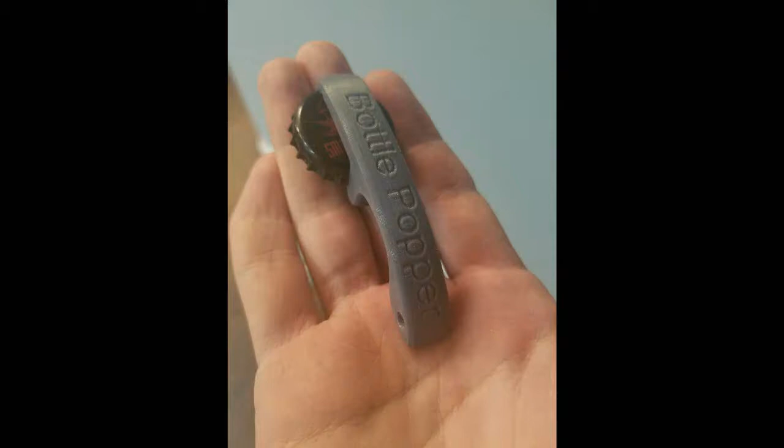Today I'm going to show you how to make a bottle opener. It's a deceptively challenging design, at least the way I did it. I know it looks simple, but there's a few things that at least tripped me up, so maybe you're smarter than me, maybe not. I guess you'll have to watch to find out.

So let's get started. As with any design, we're going to start with a little sketch here. Alright, and we've got some dimensions there. And then, of course, when you start the sketch in Fusion 360, the first thing you want to do is add some parameters as well. You can pause and save those if you need.

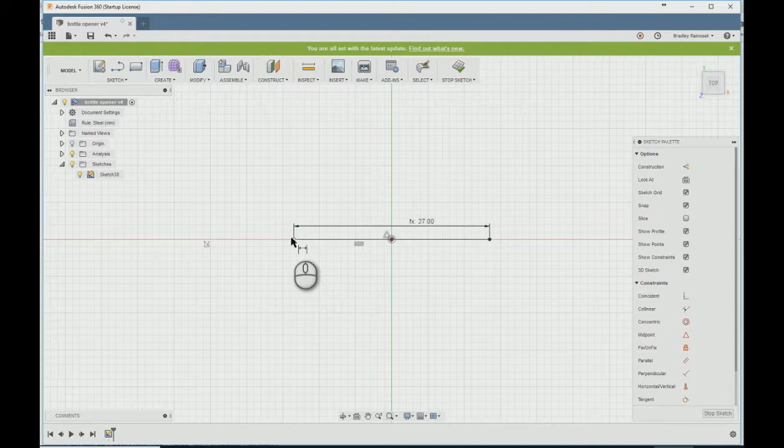Alright, we'll start our first sketch. And then just rough drawing, get everything lined up after you get the basic shape. We're going to do all of these constrained lines first, and then you want to go on to your splines and things that are going to be variable throughout the design.

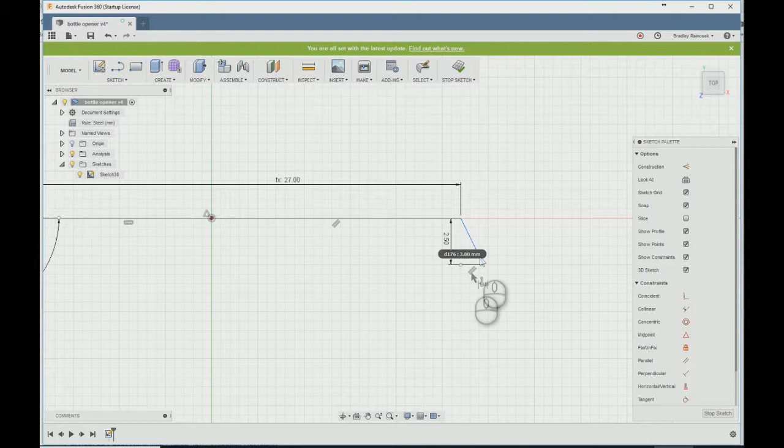Also, these constraints aren't perfect. I recorded this earlier, and I ended up tuning it myself to get some of these just right, and you'll probably have to change them a little bit yourself anyway, just in case your printer's not printing exactly the same as mine. If your extrusion multiplier isn't perfect or whatever, it's better if you tune this stuff exactly to work on your printer to fit a bottle cap.

The way I've got mine is it'll actually kind of clip on top of the cap before you pull it off, and it'll hang on pretty tight. And you pop the cap, and then it should hang on pretty tight there as well.

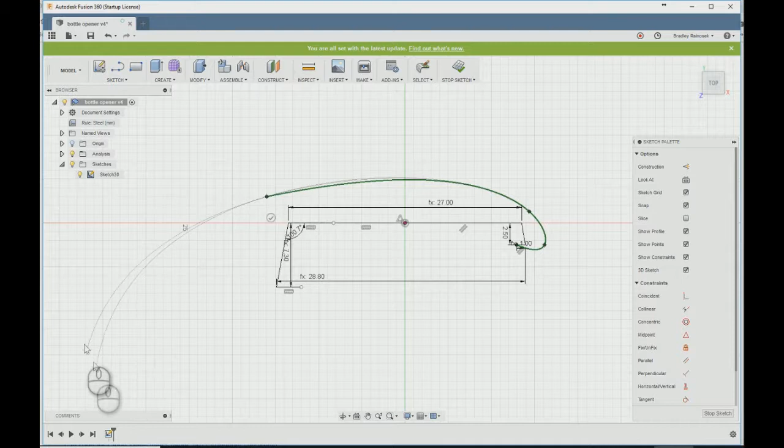Right, so here's our first spline. A big mistake I see a lot of people make here is to use too many fit points for the splines. So you really want to use as few as possible. I think there's one extra one in here we're going to have to delete. And there might be one I added in, I can't remember now. But just bear with me while we get this perfect. It'll take quite a while, but it'll definitely be worth it once you get it finished. That one's useless. Don't forget the ends can be adjusted there.

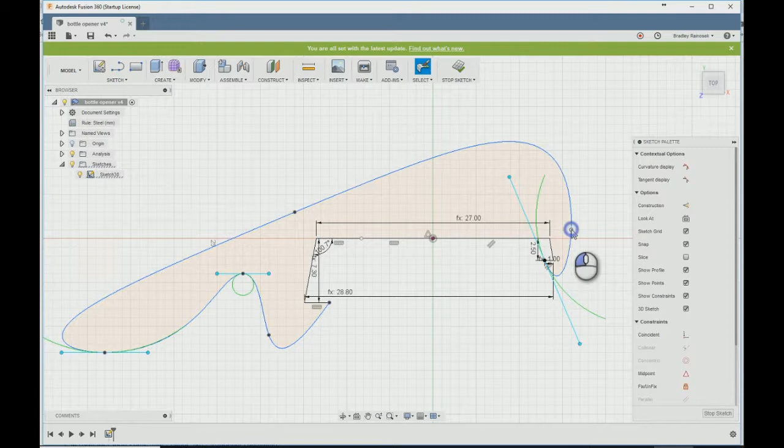Now while I do this, somebody asked about doing a pressure analysis or stress analysis of some sort, and the reason I haven't done that in Fusion 360 is because I don't think it'll do a great job with 3D printed parts. When you're 3D printing stuff, especially small simple stuff like this, I find it easier just to go ahead and print it out and then test it, and we'll add an extra fit point right there to make a better thing.

But because the parts are hollow and because of the process of 3D printing, I find it better just to kind of trial and error for most things. And you'll get a feel as you get more experience, if you haven't already, of what'll work and what won't.

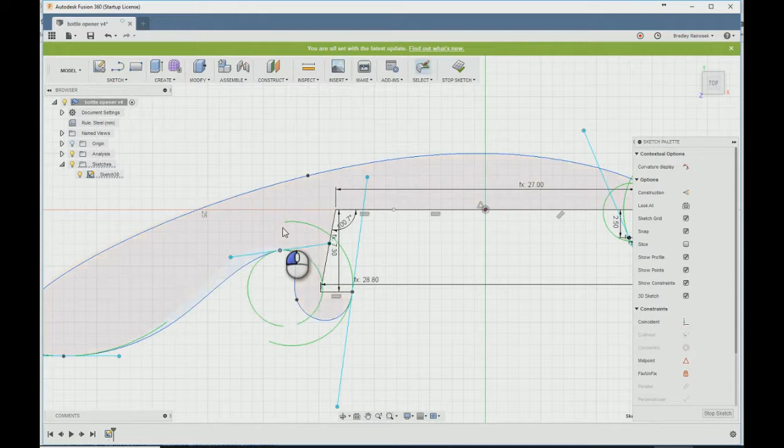The obvious main things to watch out for are sharp corners, like that top corner in this model, the 100.7 degree angle. That's probably the main part you're going to have to look out for, because it has to fit that bottle cap. We can't add too much of a chamfer to it. And I did add a 1mm after this recording. I think that's one thing I forgot to do while making the video.

But if you add a 1mm there, it's not going to be perfect, and it's not going to have the convex shape that the rest of the bottle opener will have, so it won't be quite as strong as the rest of the bottle opener. So that's going to be your weak point to look out for.

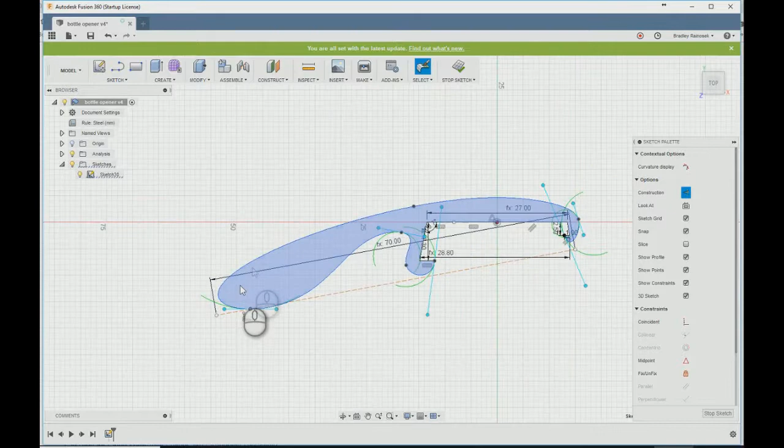And another thing I changed: in this video, I did an 8mm wall from that corner to the top of the bottle opener. I found 10mm to be as strong as I wanted. And part of that problem could have been that I tested the part while it was still warm from printing. It might not have completely cured, so to speak.

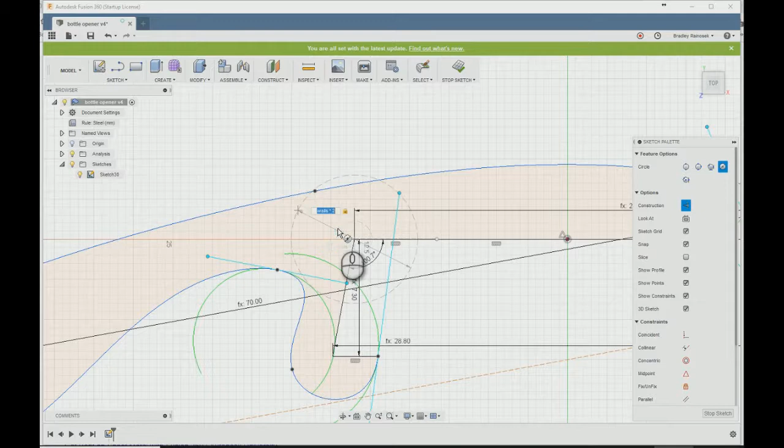But I was able to pretty easily bend it with my hands, so I ended up making that a 10mm diameter there that I just set. I also did it here as well, but that part's probably not necessary. It felt pretty strong when I tested it on that first part, but I did it anyway just to be safe. It's not a big deal either way, probably, for that second one though.

Now here I'm going to try to get that bottom overall length line. Try to get it lined up with those 3 spots. The first design I did, it didn't really line up, so it would kind of rock if you put it on a table. It'll do that. And I just found that annoying. It's not required, but I did that.

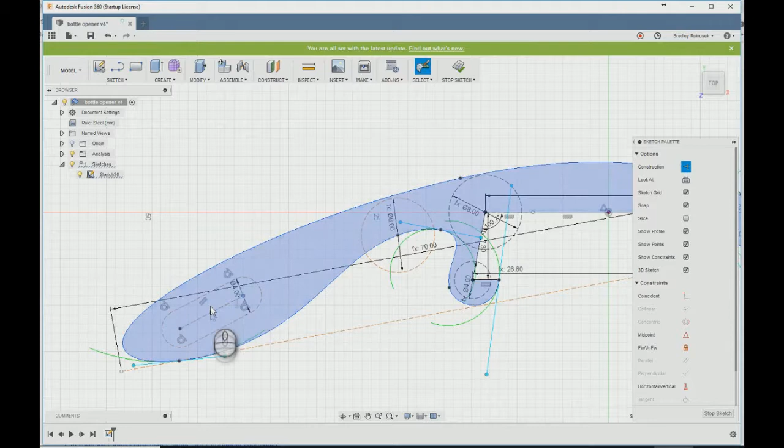And then here's a kind of sketch of where the key ring is going to be. Just make sure that it's going to fit roughly anyway. We can tune that size later if we have to.

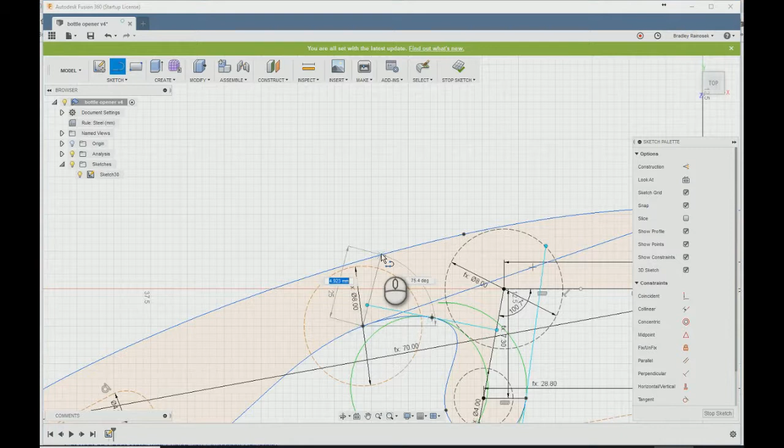I'll start doing some lines here. These are going to be used for extruding the part upwards and sweeping the parts that need to be curved to fit around the bottle cap. This is the first part that I thought was a little bit tricky, was trying to get these placed strategically to make the rest of the process as easy as possible.

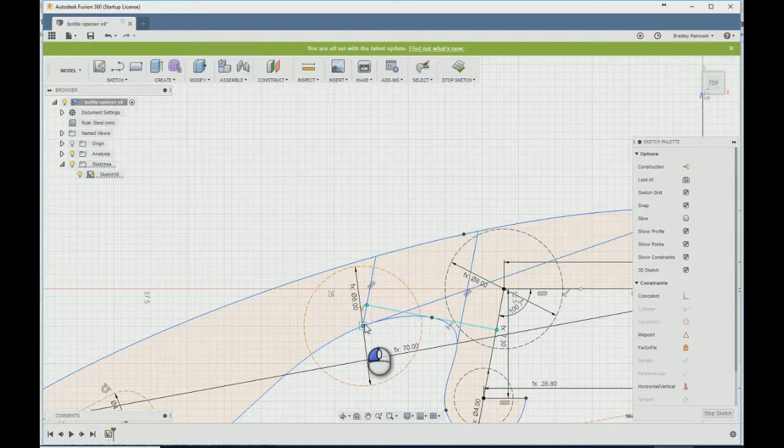Alright, don't forget to save. It looks like we're about ready to start extruding here. You really want to spend a little extra time. There again, I'm trying to adjust that even though it was pretty close, but you really want to get it perfect here. If you don't get it right here, once you get farther into the design process, it's going to be a lot harder to make changes.

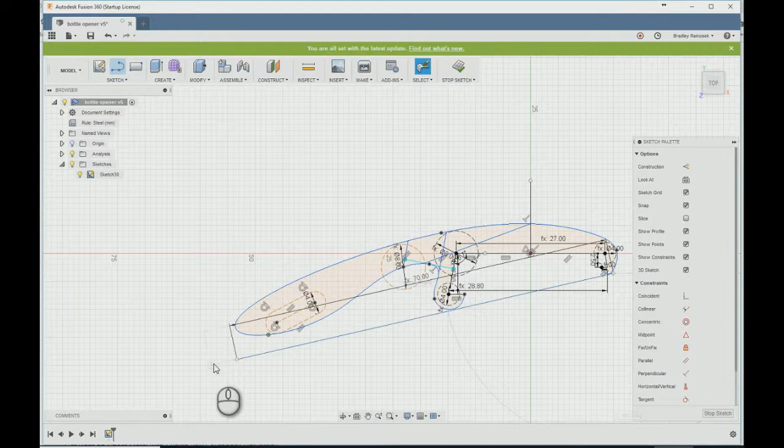Just the way that this was drawn, especially with the lettering at the very end. If you have to go back and make any geometry changes or shape of the bottle opener, it's going to take a lot of time. You're basically going to have to redo it, considering how long it takes to update all of the different sketches that we're going to make throughout this entire process. So take your time at this point, get this exactly right, make sure that top curve is as straight and consistent as possible. Make sure everything's hopefully thick enough.

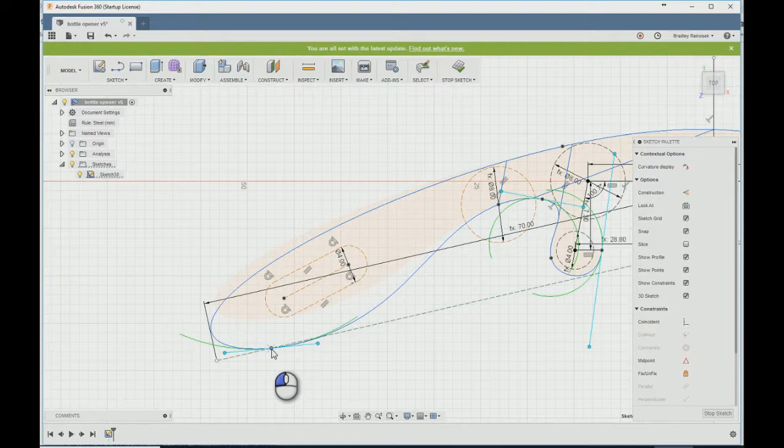I'm going to show you a spot here not too far into the design where you can stop and tune the dimensions of those teeth to grab the bottle cap. Even on my design, I still need to go back and fix that main tooth. It's a little bit long. In hindsight, that's going to be a problem too, with those 3 points being level. But I guess you live and learn. I'll deal with that on my own time. I'm not going to make you watch that in this incredibly long video.

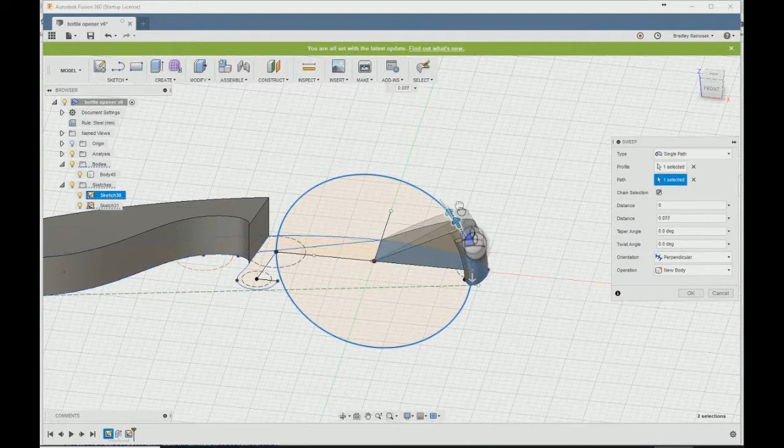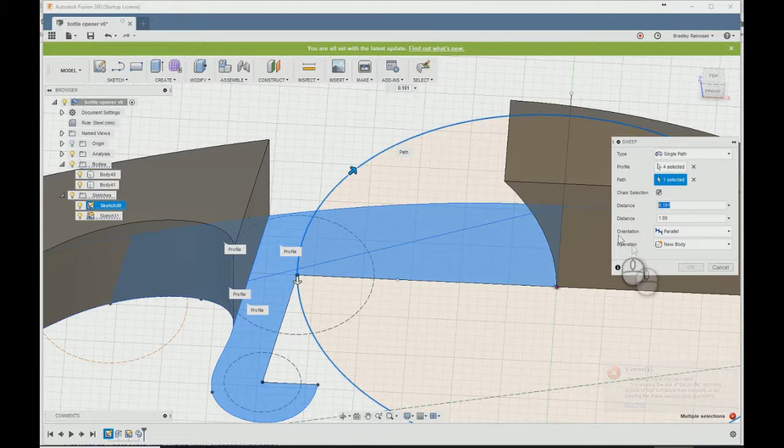There's a circle for the shape of the bottle cap, and then we're going to sweep around. Don't forget to set it to parallel instead of perpendicular. The first few designs I used perpendicular, and it was a very long process of working around fixing that and making it work well despite that. These arrows always throw me off, but I'll figure it out eventually. There we go.

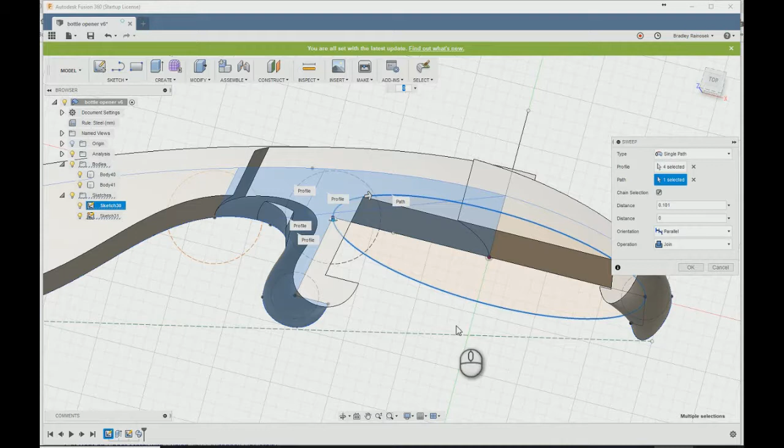Alright, it's starting to kind of look like a bottle opener. We've got some weird geometry there in the finger groove, and that's probably the main challenge with this design. It took me quite a while, and I've tried probably a dozen different ways of cleaning that up, but I finally found a really good solution, and that's mostly why I wanted to share this video. I think it'll give you some ideas for how to clean up weird geometry that happens like that on some of these more complex shaped models.

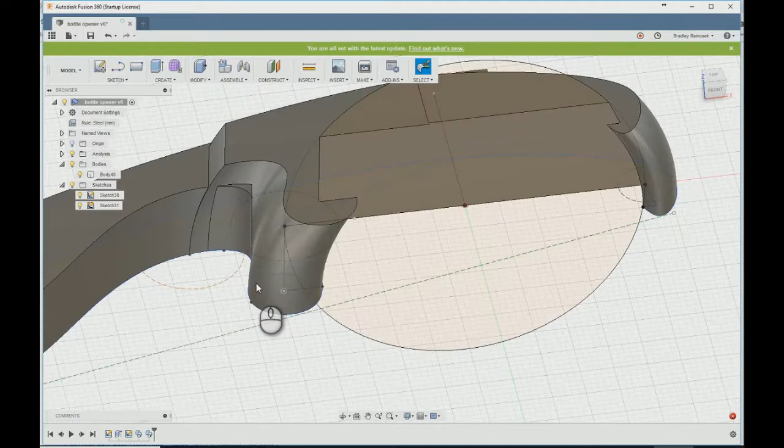And this will be kind of the difference between making your own model and any model that you can download on Thingiverse. I'm pretty sure there are a few that are pretty similar to this design on Thingiverse, but most of the ones I looked at, I wasn't really satisfied with the shapes and sizes of them. They can be pretty square. Like, you could probably sweep around this whole thing and square it up and make it a pretty simple shape, but it's going to be a little bit weaker just because it doesn't have the curves to help reinforce the printed layers, and it's just not going to look as great or feel as good in the hand, and you won't be able to put your own name on your bottle opener or whatever you want on that back curve.

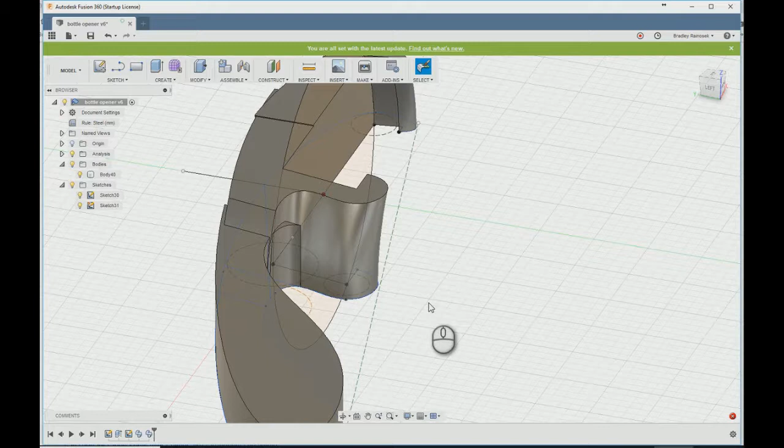Here I'm trying to figure out why it won't slice the body. I've never had that problem before. There must be some sort of weird geometry going on in there. I'm going to try a few times, but it's one of those things in Fusion 360. Sometimes it just doesn't go perfectly. I'm going to try to make some adjustments and figure out what's confusing it. It can be weird things every now and then. But at the end, after you get tired of trying it, then you really just got to figure out a different way to work around it. Remember, step back in your design until you can get it something that actually works.

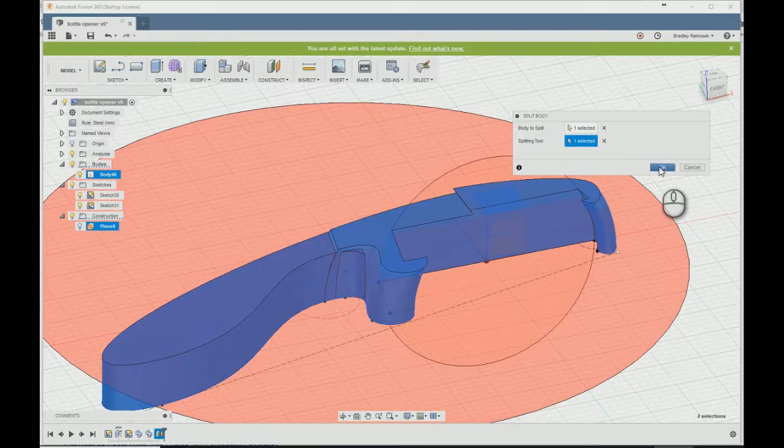So here I'm just going to do an offset plane for half the width of the part, because as you can tell, we're working on just half of it, and we'll mirror it and get the other side later. It's a lot easier just to work from a half design when you can. There's definitely times where that won't work, but this is one of those times where it's much easier to work on just half of it.

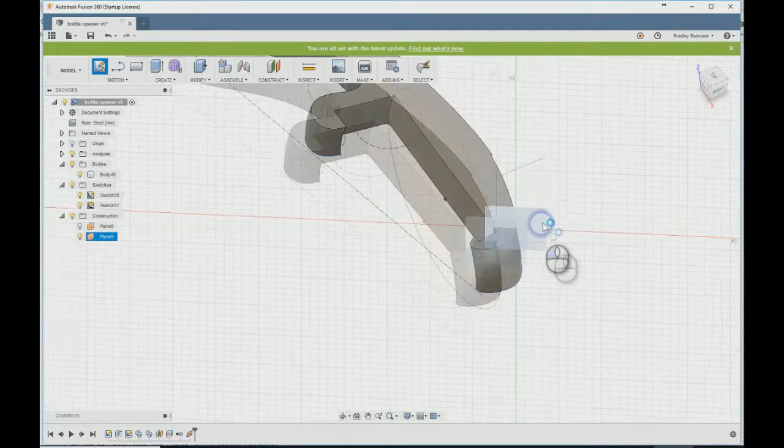Alright, now here when you do this plane, you might want to go a little bit farther down and to the left. It'll make a steeper angle. It'll feel a little bit better. Where I've got it now, I actually changed it on my design as well. It's going to be a little bit square. You can see that angle that we're intersecting there. It's not really as steep as you might want it to be. Not in my opinion anyway.

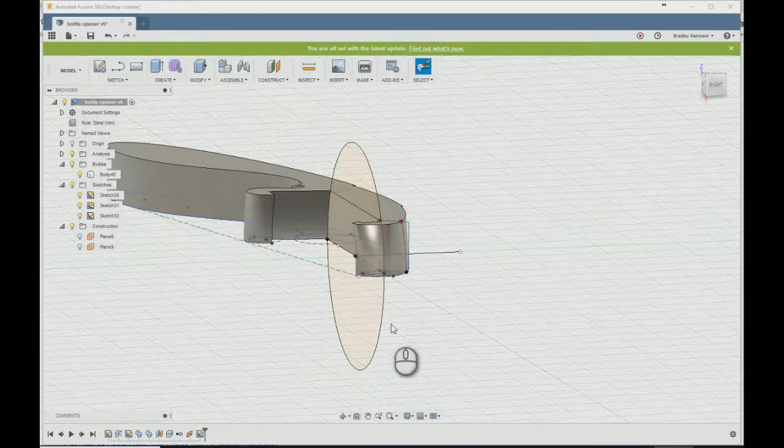It'll work fine, but it's just one of those things; it'll make it feel a little bit smoother if you bring it back towards the very front, the little tooth there on the end of the bottle opener. You don't want it all the way on the end because it'll make the edges too thin, but definitely I'd recommend bringing it back a little bit more than where it is now.

And when you're doing the sweep, don't forget to change that orientation to perpendicular. We set it to parallel before, and that's what's throwing me off right here, I think, too. I'll figure it out eventually. Here we go.

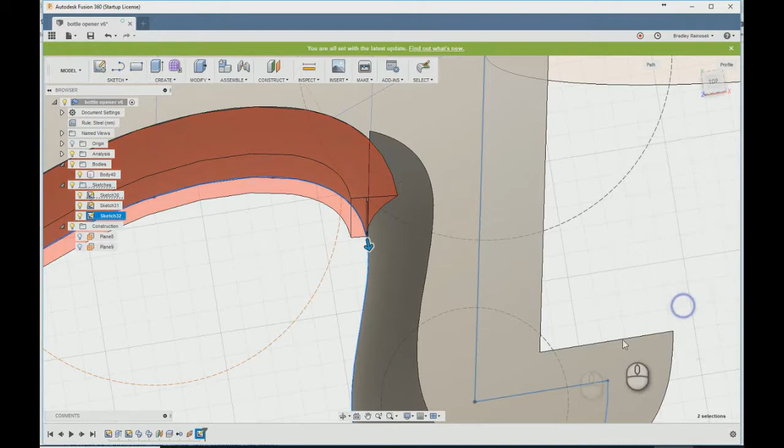Alright, now we're getting into the spot that's going to be a challenge. You can see it's kind of making a weird sliver there at the very end. I thought it would sweep a little bit farther and get rid of that, and it's kind of one of those shapes that Fusion doesn't really like. It's a very thin spot with a very sharp angle. That can cause some problems sometimes. You can try adjusting that, but in this case it's not really going to make any effect.

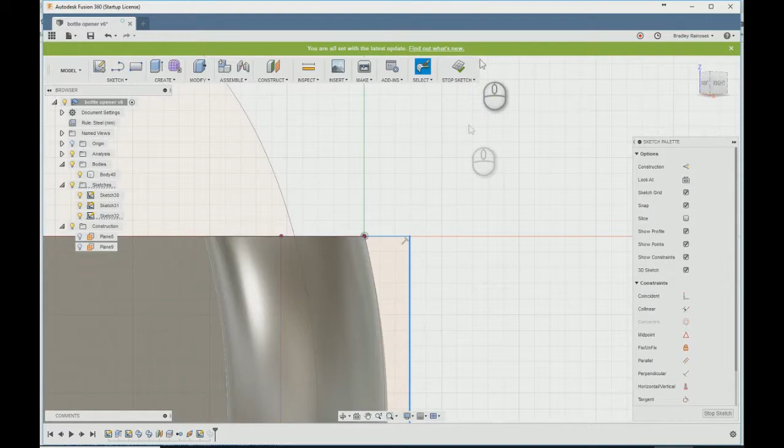The ultimate solution is going to just be to back it off a little bit to make a sizable shape there that Fusion can handle better, and we'll get rid of it with a couple operations afterwards.

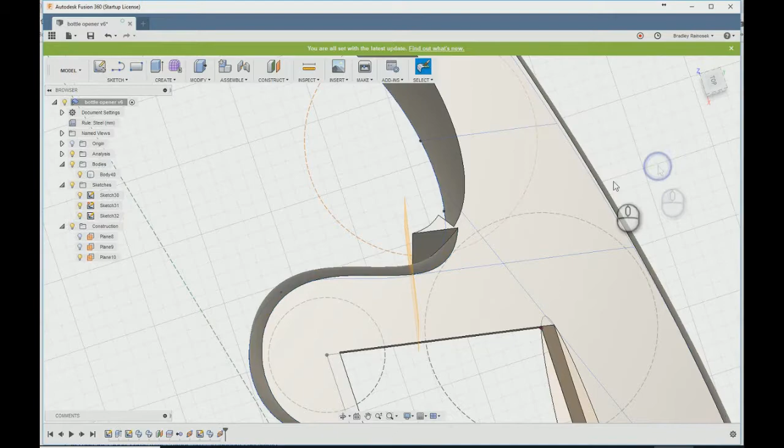And we're almost there, but right now would actually be a good spot, if you could slice this bottle opener in half using that weird geometry. Now would be a good time to start printing your first version, so that you can test the shape and size of those teeth and make your adjustments while you work on the rest of this. We'll get there pretty soon in the video, but I'm going to clean up this geometry first while we wait. So just do an intersection there, do another box just like I did with the sweep all the way around.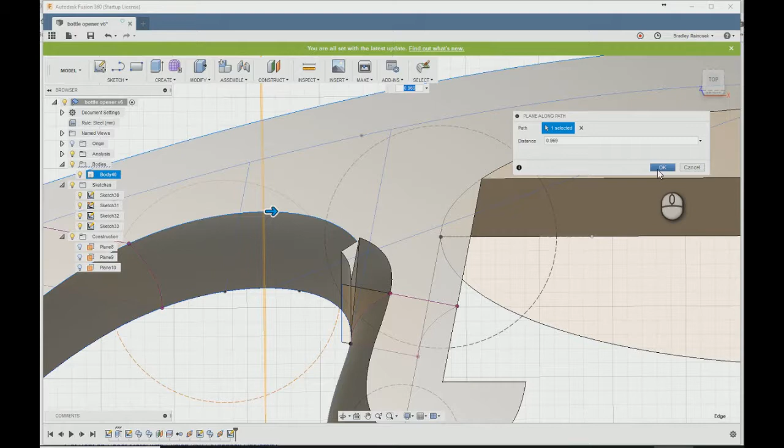Alright, here's our second one. This positioning of these planes doesn't have to be perfect, but you'll see if you watch ahead a little bit before you actually do it yourself. You want them kind of at a flat area, but you want it to also be curving down, because of the guide rails for the loft that you're going to use. You want them to not cross over the outer perimeter of the edges of the bottle opener. So the two profiles are looking pretty good.

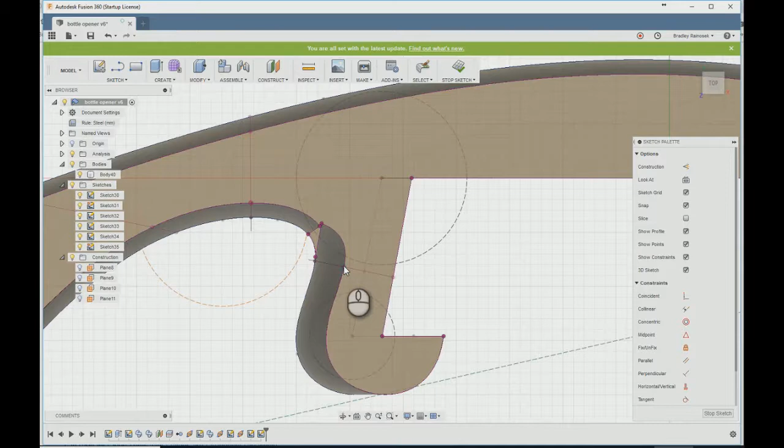I'll start a sketch here to do our first spline to be a guide rail for the loft. And don't forget again, you don't want to use any more fit points than you really have to, to make it a little easier. So in that interest, we're just going to do each end and then drag them around, and you'll have plenty of control using just these two control points here.

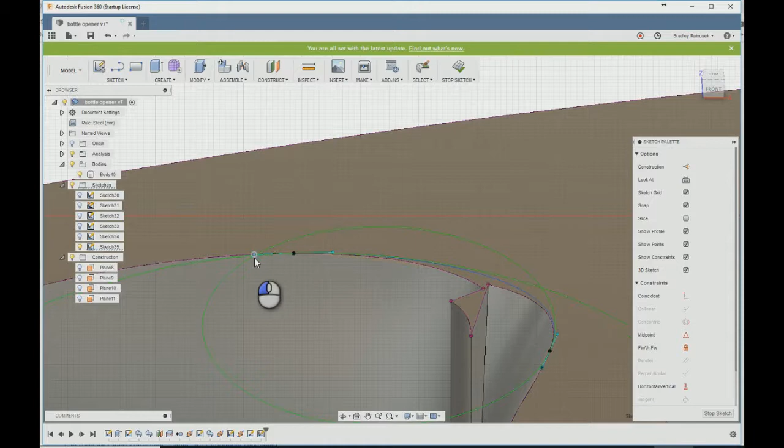You can lock it to the edge there to make it easier to control too, but if you want to get it right on that line, you don't want it too far in either direction. You want it to be as smooth of a transition as possible, but make sure it doesn't cross over. It's going to make a little lump in your part. It would be very hard to clean up without making the geometry look kind of weird.

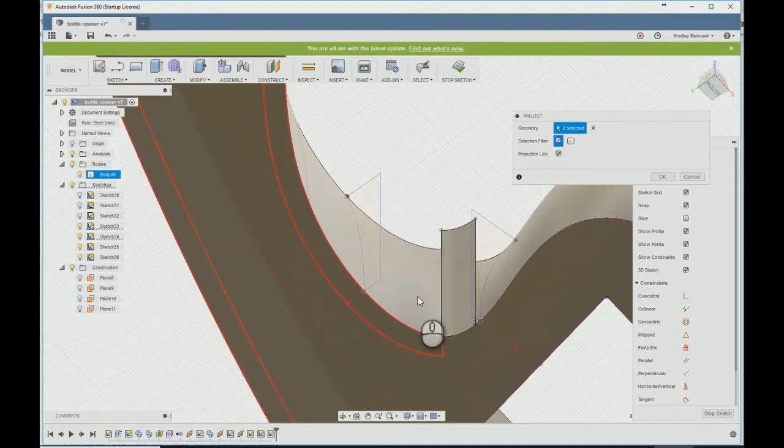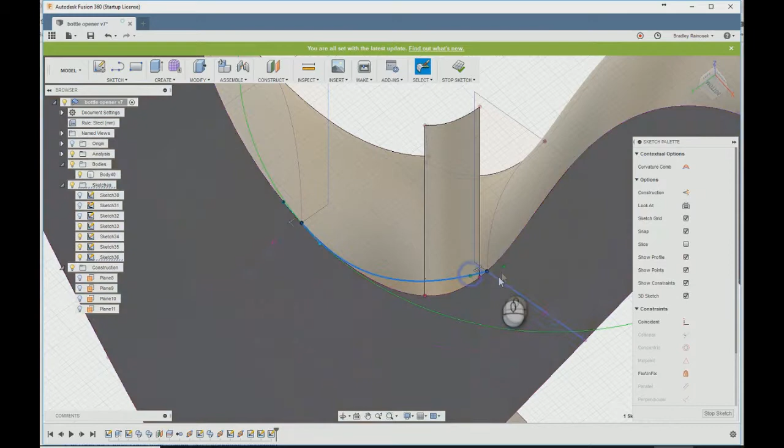Sorry about how jagged this looks. I know it's a very low frame rate. I didn't realize at the time when I was recording that it was only going to be in 10 frames per second. But I'm using the screen capture app that you can install within Fusion 360. Next time I'll try to use OBS or something like that with a slightly higher frame rate. It is unfortunately choppy. It almost looks sped up, but this is actually the speed that I was working.

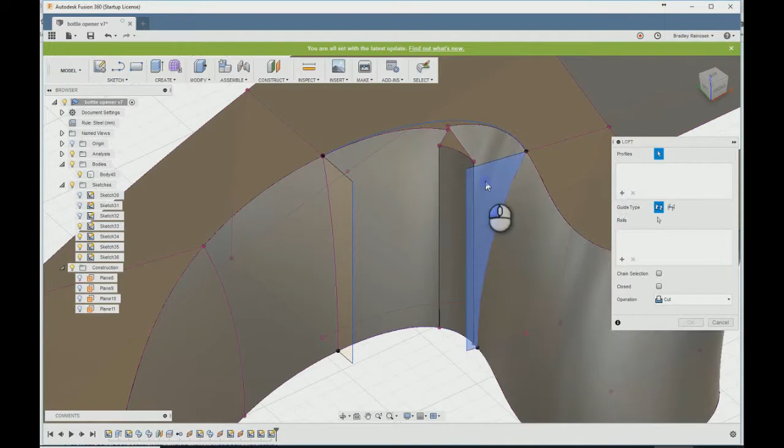Before this recording, I'd actually drawn this entire thing probably twice trying to get a good recording. But I got hung up in a couple spots just from weird Fusion mishaps. Sort of like when I was trying to slice it back there and it wouldn't slice the body to make the entire top of the bottle opener flat. I had a few problems like that with the previous two attempts, and it made the time go up to 45 minutes to an hour for each of those recordings, so I knew I could get it shorter, and this one looks like it'll be about half an hour, maybe a little more, but not too much.

Alright, now that we've got that cleaned up, add a little fillet there. You could add a little fillet on those two new edges that it made on either side of that loft. I probably should have, but it's not a big deal. We did pretty good keeping that smooth.

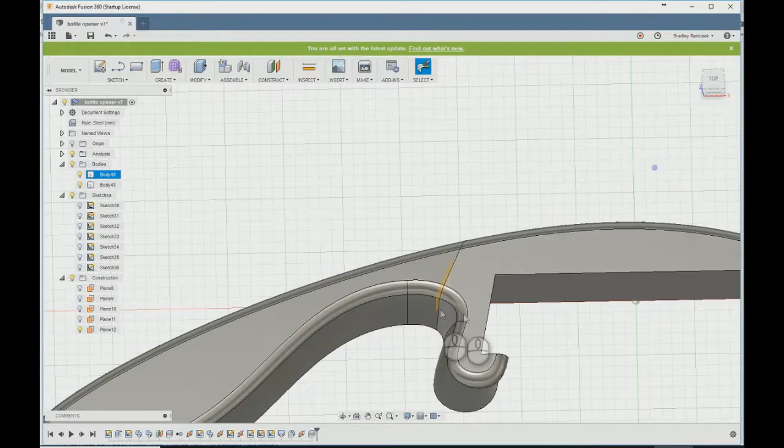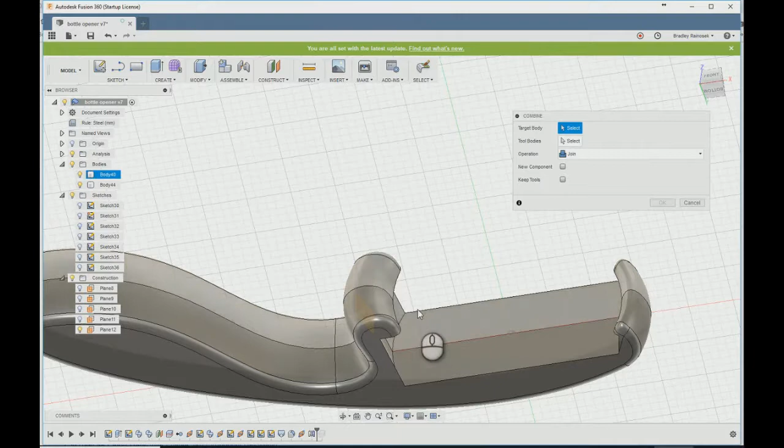And of course, before you print it, don't forget to mirror and combine the two pieces. You want to print the entire thing. It's not going to be much use printing half of it, or a quarter of it, really. I misnamed it, but in this case I'm just making it for the video, so I'm not going to test it right now. I'll go back and do that after this recording.

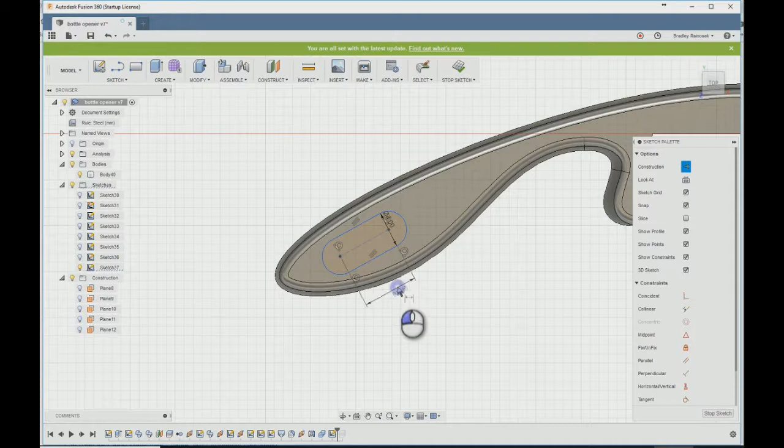Alright, and while you're printing your first versions, if you haven't already, or while you're waiting on a version 3 or 4 to print, you can go ahead and add in this keyring hole. This is another one of those little features that you're not going to get on a Thingiverse model. If you know how to make this keyring hole actually fit the keyring, you can have a path where it fits the keyring perfectly instead of just being a hole straight through the part. It's one of those little features that you probably couldn't even get in an actual injection molded part, at least not as easily as you could with a 3D printed part, where you can make any geometry you want.

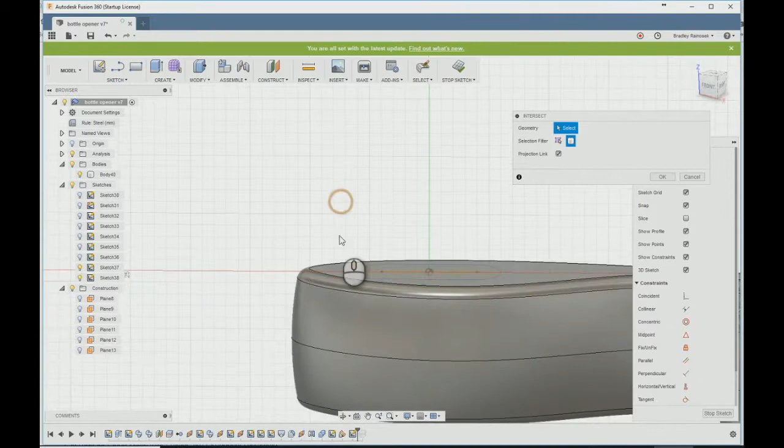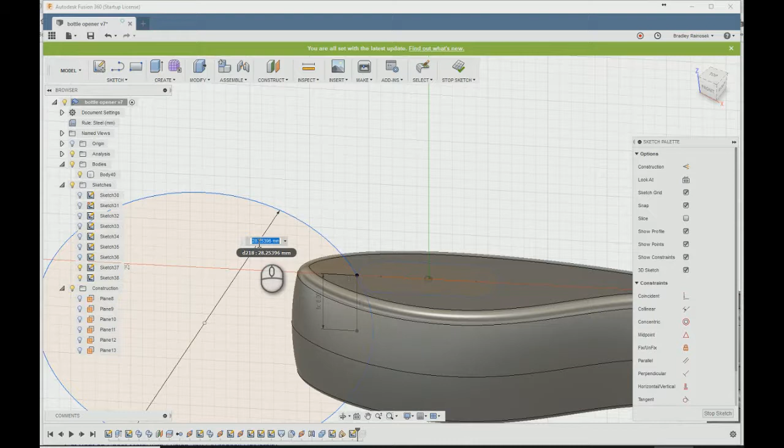So model that slot on the top, and then we're going to project it onto a perpendicular plane. And we're going to draw the circle that'll represent the actual keyring, which will be basically the path for the slot to be swept through, or extruded through, basically. There we go, and then decide the diameter, which should be a parameter, hopefully, if you're doing it right. Alright, and then just sweep the slot through around that keyring. Perfect.

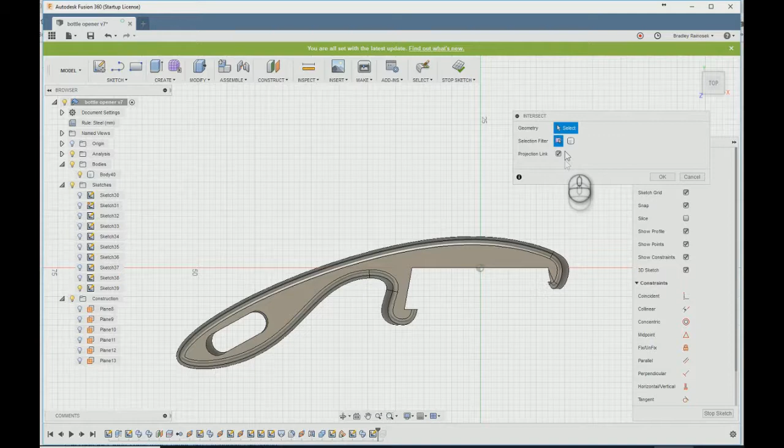Alright, so here's where you really want to stop. You don't want to go any further than this without being sure that the shape of your bottle opener is going to work for you. If you go any further and you have to change it, you're going to have to redo everything basically after this point anyway to make the lettering work. So there's really no reason, you'll just be wasting your time if you go beyond this until you're ready with your final version. I did that several times and I regretted it every time, so don't make my mistakes.

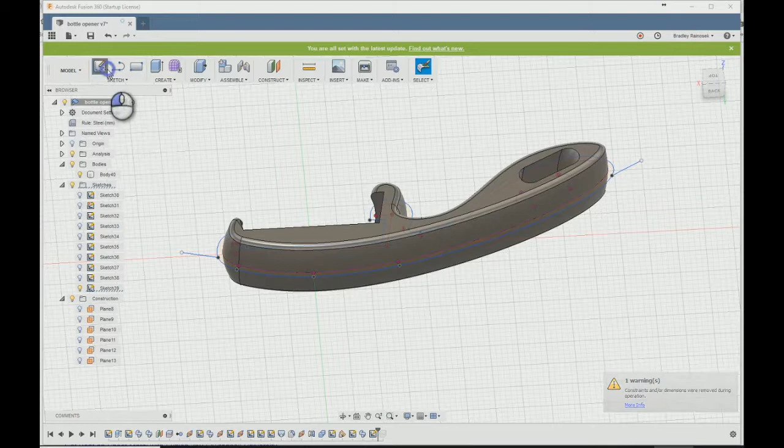So in order to get that text where it says 'bottle popper' on the top of the bottle opener that I showed you at the beginning, you could extrude it straight on, but if the curve of the top of the bottle opener is too steep, you're going to get some distortion in the letters, and I'm sure you've noticed that with other models if you have a lot of experience in Fusion 360 and try to put letters on stuff like I do anyway.

So in an attempt to get around that, we're going to use the sheet metal flanges. I'll walk you through it here. I'm not sure if this is really the way it was designed to be done. It kind of seems a little bit iffy about if it wants to work sometimes, and it can cause a lot of lag after these letters are extruded onto the part as well. You'll notice that as we get into it as well.

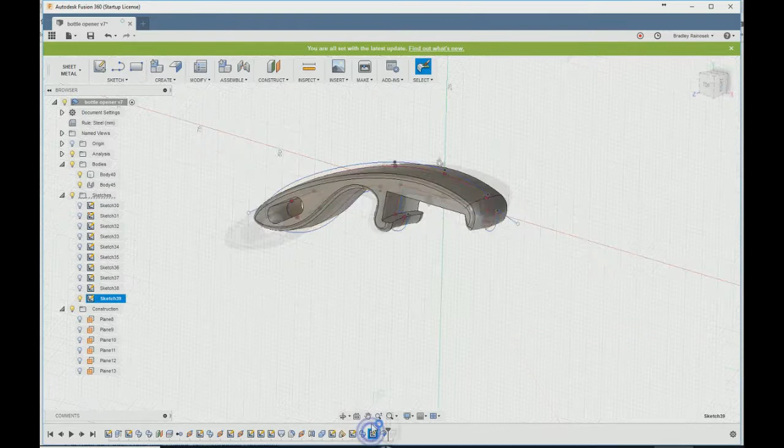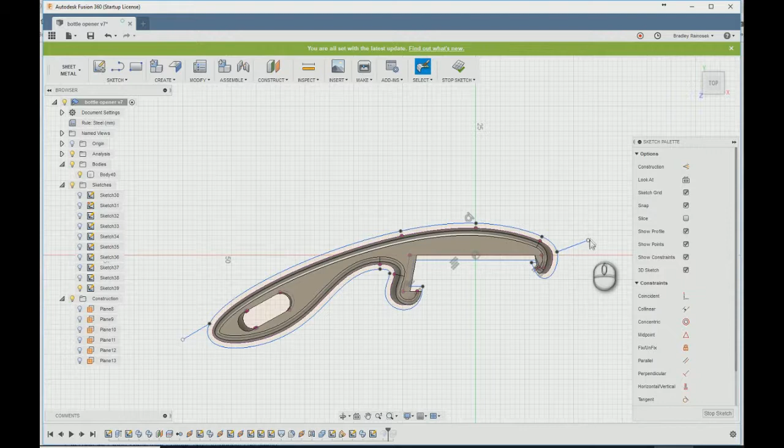But it works. It's not super easy, and as you can see, I'm struggling again with unfolding these curves. I figured out after this recording that if I would have clicked on the back side of that face, it probably would have worked, but in this case that didn't occur to me for some reason. I really just wanted to unfold it on the face that I was going to be extruding onto, I guess. So I worked around it by adding the tail on the other end eventually. Sometimes changing angles too, or making that an exact tangent like I did just there, can help sometimes, but really just try the back end of that on the other side, or add that tail on the other side like I'm about to do here in just a second.

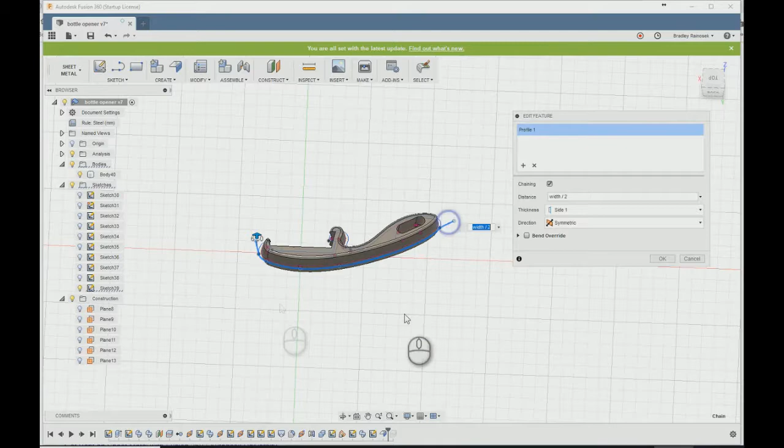I'll do that, and then I'll still try that one just to see if the tail helped, and it didn't. So we'll unfold it with the other one.

There we go. Again, I'm pretty sure that's not the way. I saw this as a trick online, and it works pretty well. It's a little bit buggy like you saw, or it doesn't work the way you might think that it should, but it works most of the time anyway.

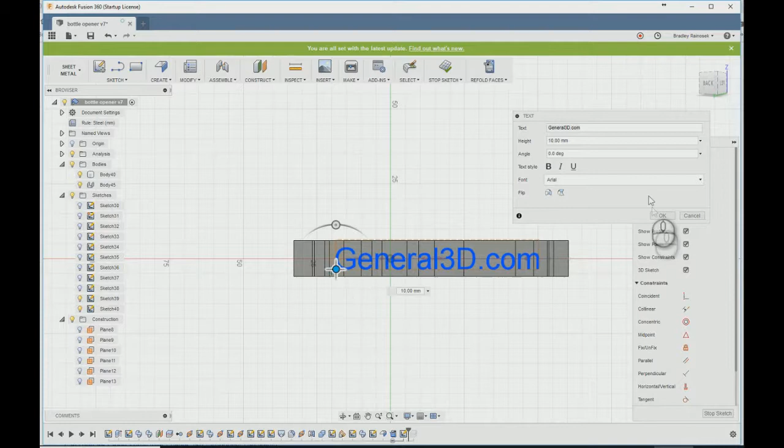So now that you've got a flat surface, you just put your text on there. You might have to eyeball it a little bit because those tails will add a little extra material where you can't really print the part, but make it go as far into the flange as you can without going all the way through. If you go all the way through, Fusion 360 is not going to be very happy.

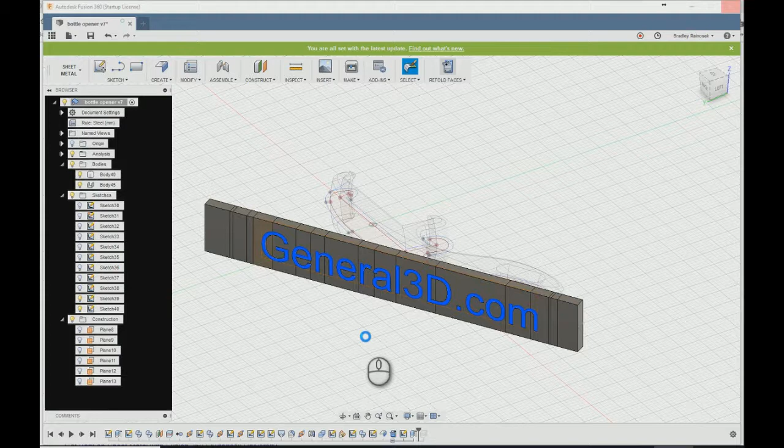So this is another part where sometimes it'll throw some weird errors, and it might be easier just to delete the whole thing and restart the flanges if it throws a fit. It usually works without too much trouble though. And there we go, it worked well this time.

Alright, so we've got the text going around left to right, and well, it accidentally cut through the part a little bit there. We'll go back and fix it in just a second. That's unfortunate, but there's also a curve going up and down as well that we're going to account for.

If you're only insetting the text maybe 0.1 or 0.2 millimeters, which is what I usually do, if that curve is too steep, it's going to be very obvious that the top of the letters is way less inset than the middle of them.

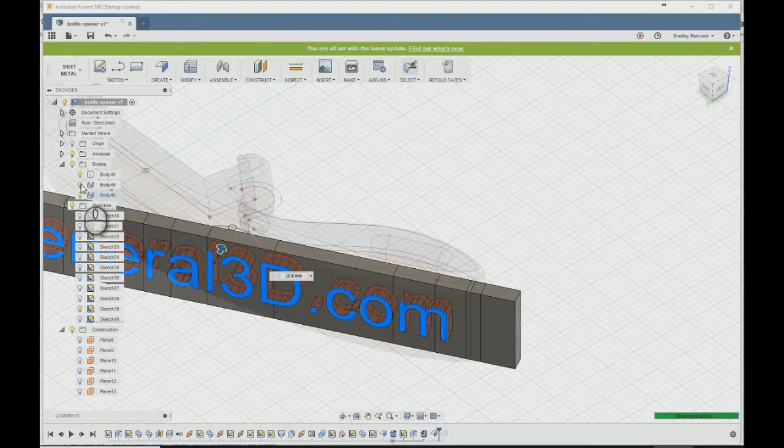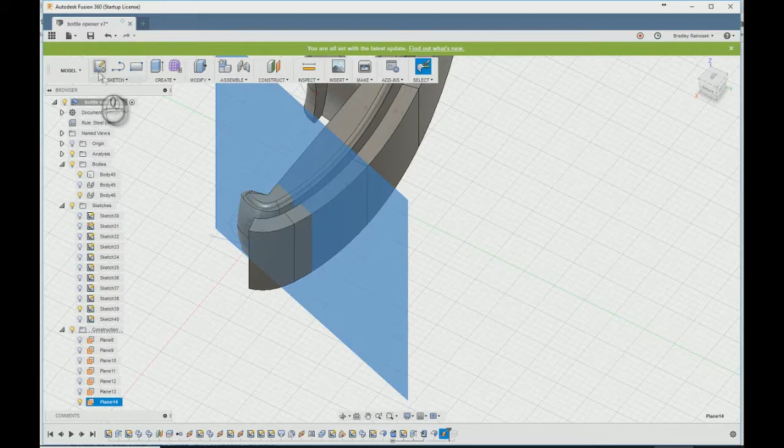So I'm going to show you a trick here to make another flange, and then you combine them, and then you'll be able to thicken and extrude them into the part with the proper curves. And then there'll be a consistent inset all the way around the curve, both side to side and up and down. That's just a much more professional looking result than if you just extruded straight onto the part and your letters are all distorted.

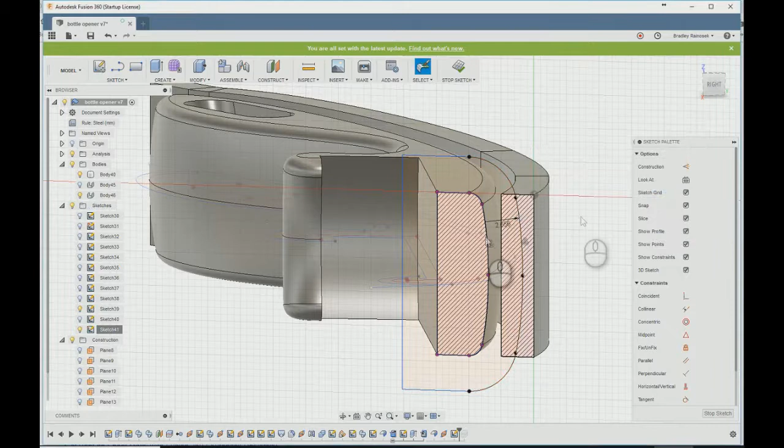It's one of the limitations of Fusion 360 that I'm not a big fan of. I'm not sure why this process has to be so hard. But once you figure out this process, it's not that bad. It takes a minute to learn and figure out exactly how it works, but as long as the program doesn't throw any weird errors that you can't figure out, then it works pretty well.

Just make sure you save it for the last step, because like I said, if you have to go back and fix it, you're going to have a bad time.

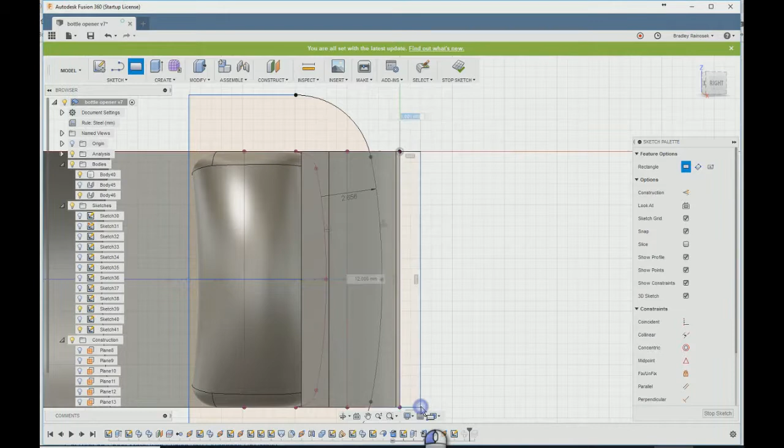Here's another one of those things where Fusion does kind of a weird thing with the geometry. I don't know why it's leaving those zero thickness walls there, but it's an easy fix. I'm gonna make sure it's on the right setting. So we'll fix the sketch. We'll just make it a little bit thicker so that it'll be obvious that we want to take that entire thing.

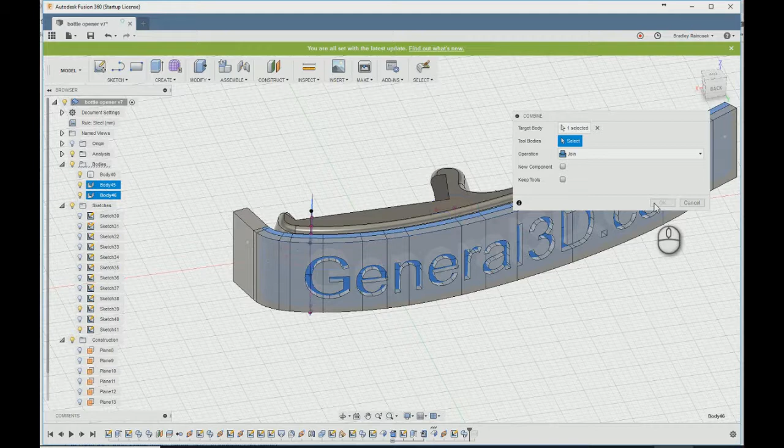Alright, that's a nice curve. Combine them, you can see, if you take both of those together, it's going to make a nice curved letters inside. As long as you got that curve far enough in.

You could clip parts of the tops and bottoms of the letters off if you didn't get it deep enough into that second flange. But as long as you extrude the letters as far as you could into the first one, and you got that arc pretty deep into the second one, you should have plenty of margin for error.

Alright, now we need to change to the patch environment, and I'm going to select for an offset for each of these. There's no way to extrude that plane because it's curved letters, and they're curved in both dimensions, unfortunately. So it's kind of hard to get it to be able to extrude that into the part.

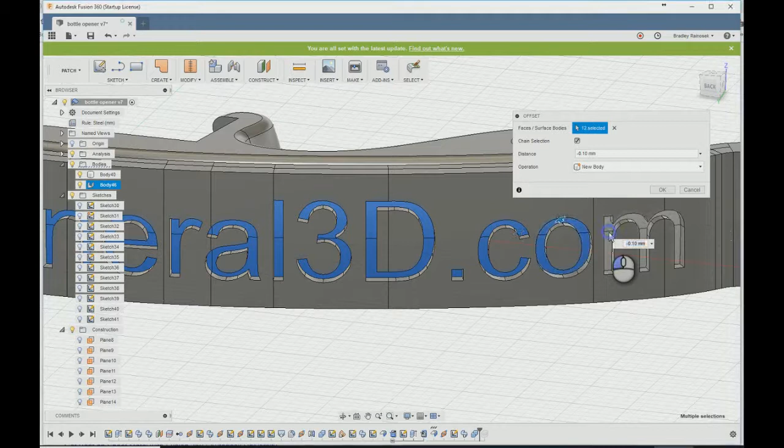But if you take this offset, and then we're going to take that offset and thicken it into the part as a cut operation, you'll get exactly what you want. You can see the letters, and when we thicken it, we need to know exactly how far to go.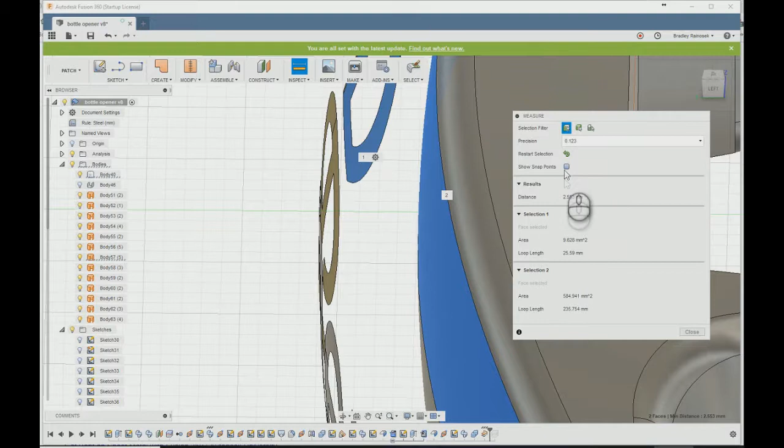It takes too long to do the operation if you don't know exactly how, because every time you change the distance, it takes quite a while to calculate. So, 2.553 — you would think there's a way to copy that to save it for later, but there's not. So just memorize that, whatever that number was for you, and thicken.

Select all the parts. I'm not sure why shift clicking isn't working. I'm going to try control clicking, and we'll just have to stick with that. So click each letter.

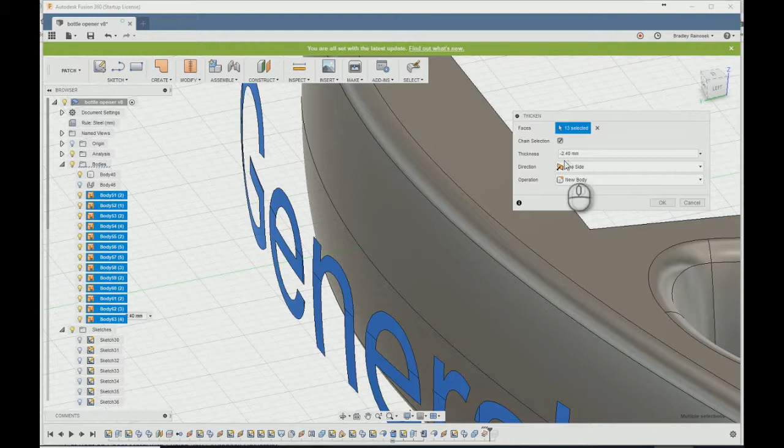And then we're at 2.53. So we'll add the 0.2 millimeter inset that we want, and we'll get a 2.73. It could have been a little bit more. We're going to come a little short, but it'll be close enough, well within the margin for error.

Change that to a cut because for some reason it doesn't automatically do that, just like a sweep or extrude would. And then here's the lag I explained earlier. Maybe you won't have as much of a problem with it. I'm working on a 4670 i5 processor, but I really need an update. I make do with what I've got. I guess I'm too cheap to upgrade right now.

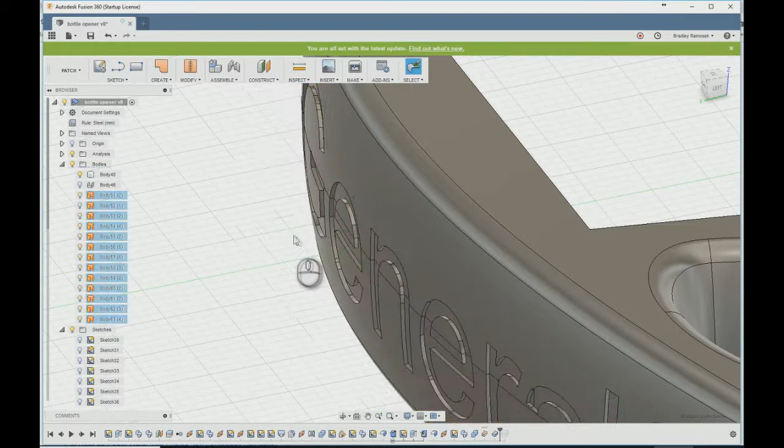Give it a few more seconds. You can already see it looks like it's going to do what we would want it to do. And you can go ahead and remove that stuff if you want to keep it clean over there.

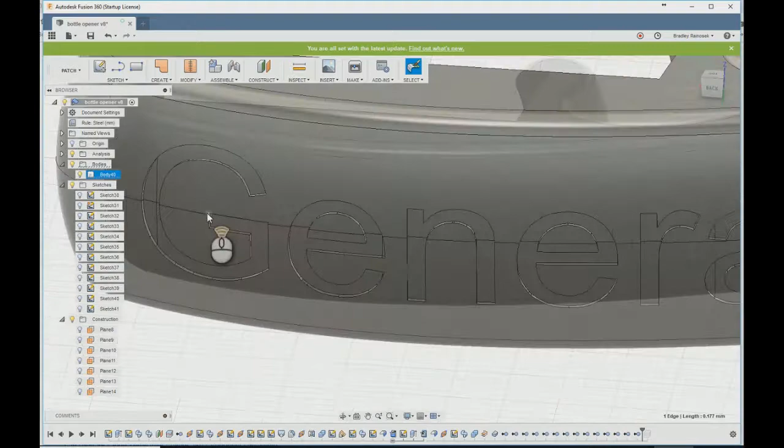We've got a weird line in here, but we've got a 1.73, 1.77 right there in the middle, 1.77 all the way at the top. It's the same all the way around, top and bottom, middle of the letters, all the way around the curve of the bottle opener, all the exact same inset.

So that's exactly what we wanted. I think it would be pretty obvious if you were lazy and the letters weren't uniformly inset into the part. It comes out in the print if your printer's printing as well as it should be for a print like this. But that's how you do it.

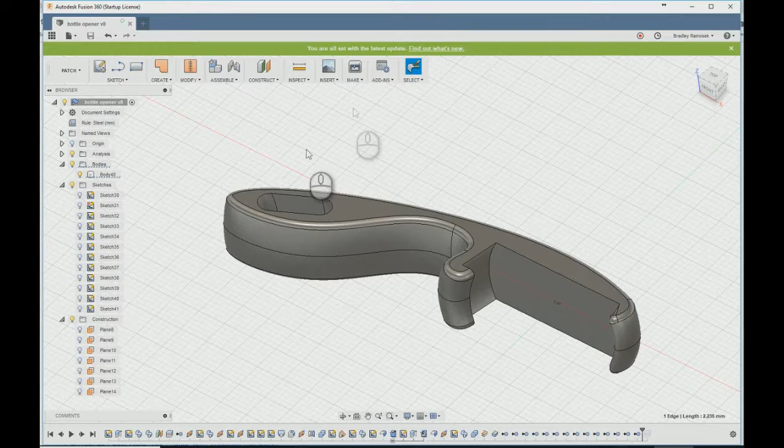The only thing that's left really is we'll add the letter or the words bottle opener to the other side. That'll just let people know if somebody finds it on the street or something. Don't forget to save again. But that way, if somebody finds it and they don't know what it is, it might not be obvious to somebody who didn't actually make it. They'll be able to tell what they're looking at.

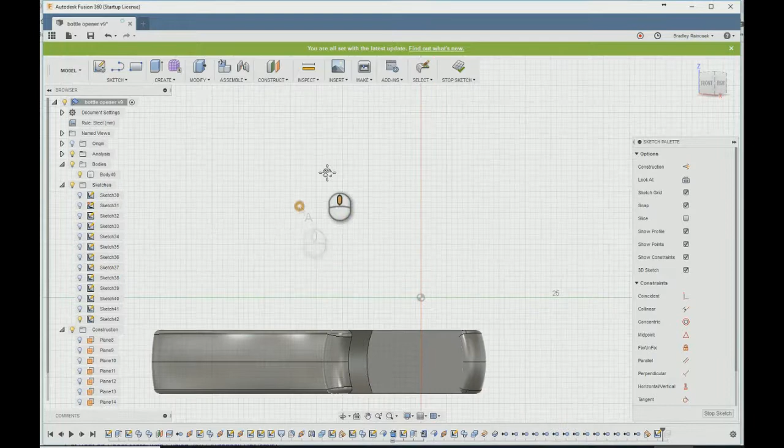So on this side, I'll show you kind of what happens if you're lazy about it. And it'll work a little bit because the angle of that grip goes back and forth across the central angle, which is selected there. But it's not ideal, but I'm too lazy to go through that entire process just for a short word on a relatively flat plane.

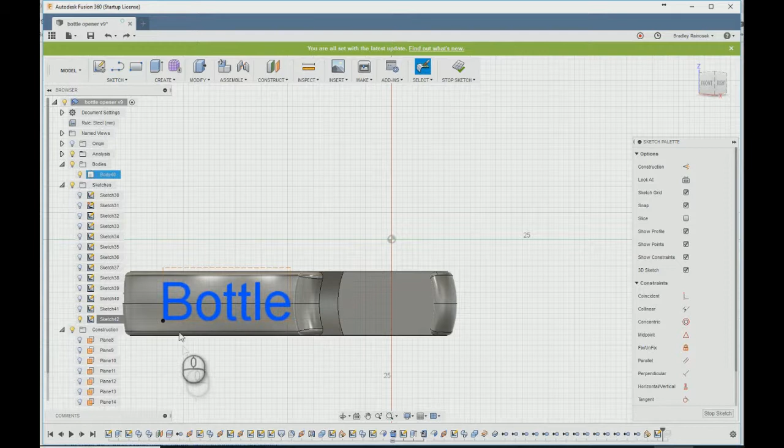Really, the only part of this word that's going to be a problem is that B. You can see it's kind of going on the left side of that arc. It angles away. It's going to stretch it out a little bit, but because of the shape of the letter, it's not going to be super obvious.

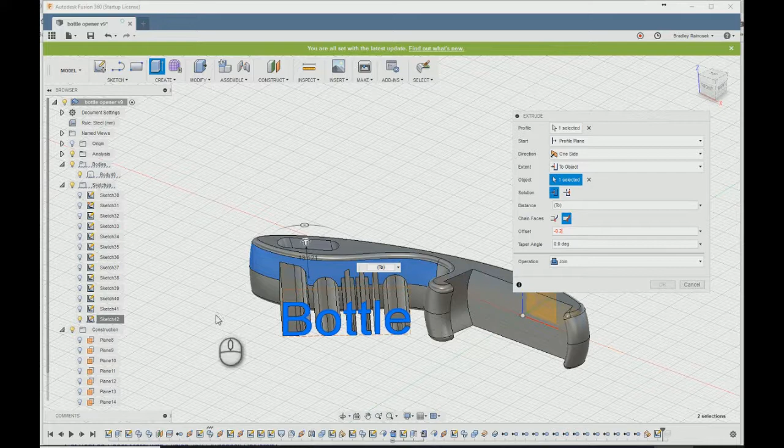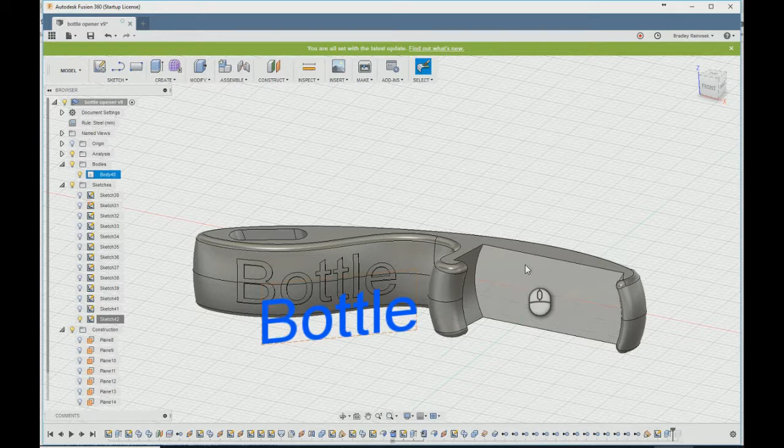And then over here we'll just do opener. It's a nice flat surface, so there should be no problem. The only challenge is getting the size right. That should just take you a few seconds. A little small, a little big, and we'll get it just right. There we go.

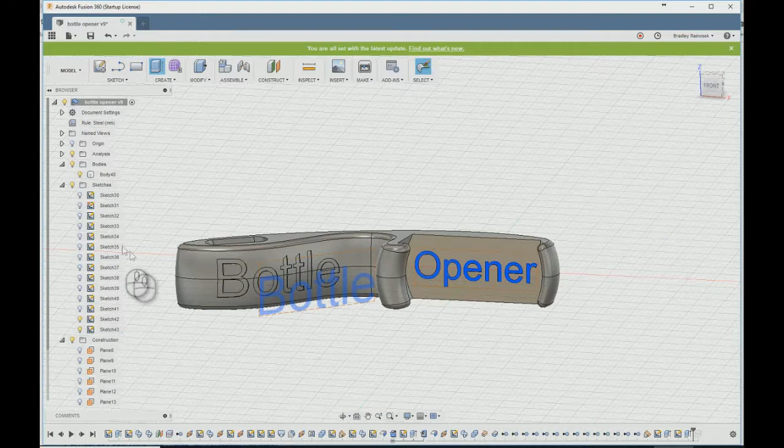Alright, but that's basically it. That's the bottle opener. Hopefully it wasn't too confusing. If you had any questions, please let me know. I'm always willing to help out. I've definitely gotten plenty of help from the 3D printing community myself, so I'm always more than willing to give back in any way I can. That's why I made this video in the first place.